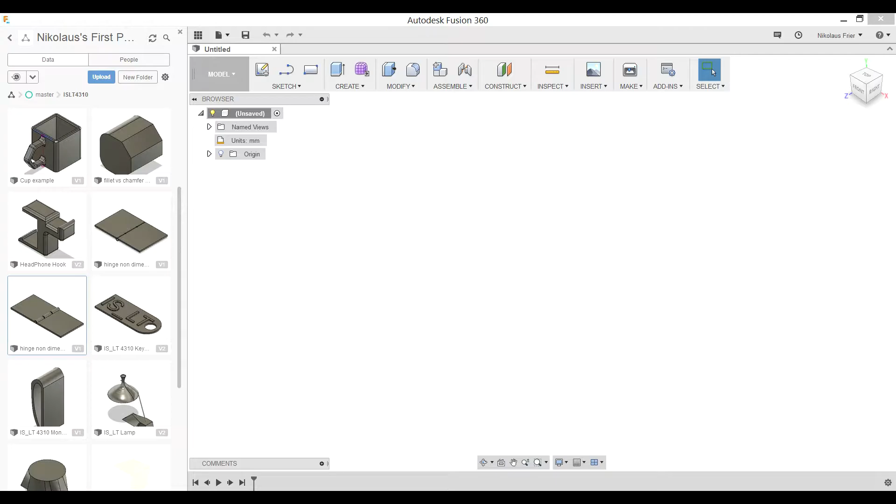Starting off, when you open up Fusion 360, you will need to navigate to the grid or data panel and open up the hinge that you created for MiniProject 3. Now you can go ahead and close the data panel and you should be left with only your hinge mini project open. Starting off, we need to go back to our previous hinge and make some alterations.

As you can see on my screen, right now we have the fins and the rest of the hinge all in one piece. We need to change two things. One, we need to make sure that the fins are the same size as mine now. In the previous mini project, it wasn't stressed, but for this project it is important that my fin dimensions match your fin dimensions. So we're going to have to go back and fix that.

To do that, we're going to go into the fin extrusion. Later on in the video, I'll talk about the accurate dimensions for the width and length of the fin, but for now we're just going to do the thickness of the fins.

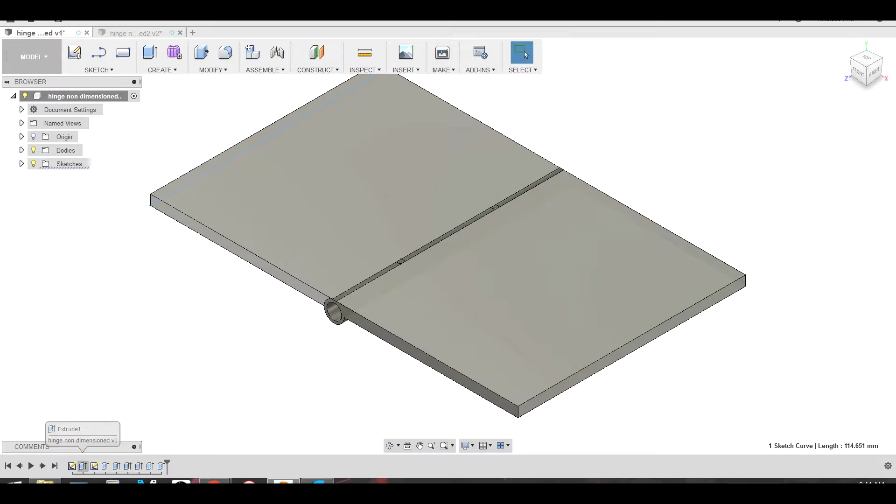Go down to the bottom. It should be the first extrusion in between the two sketches. Right click on it, edit feature. We need to make sure that this distance is 5 millimeters, but in the negative direction. So type in a negative sign and 5 millimeters. Hit OK, and that should automatically update your circles for you as well for the knuckles.

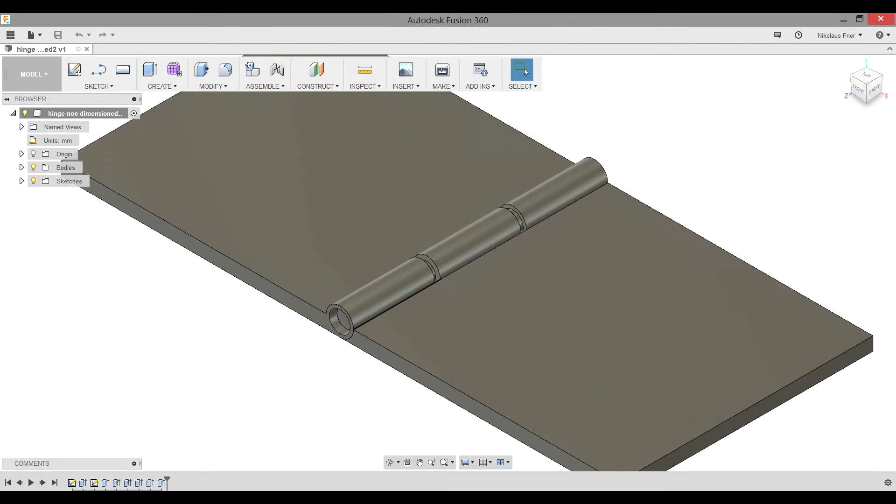If you remember from MiniProject 3, we left certain spaces on each of the fins so that we could indeed fit the knuckles of each fin onto the other. However, one thing we didn't do was make sure that these fins actually had a gap between each other. Right now there is room for the knuckle, but that room is 0. They're touching, and that's not good if we want to try to print this object all together at once.

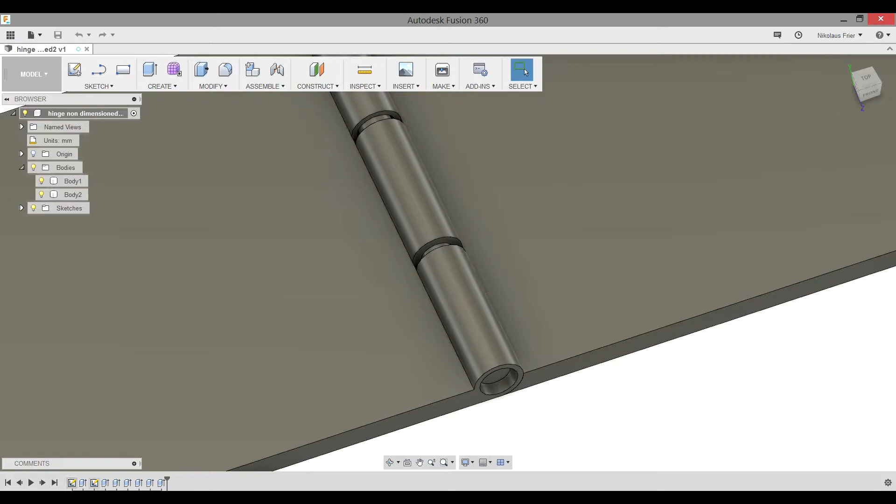What we need to go back to is our circle sketch. Down in the history, you can see our second sketch, or sketch 2. Right click on it. Sometimes edit sketch won't be available right away, so click off again, make sure the sketch is still highlighted, right click, edit sketch. You can also just double click the icon and that should bring up the sketch.

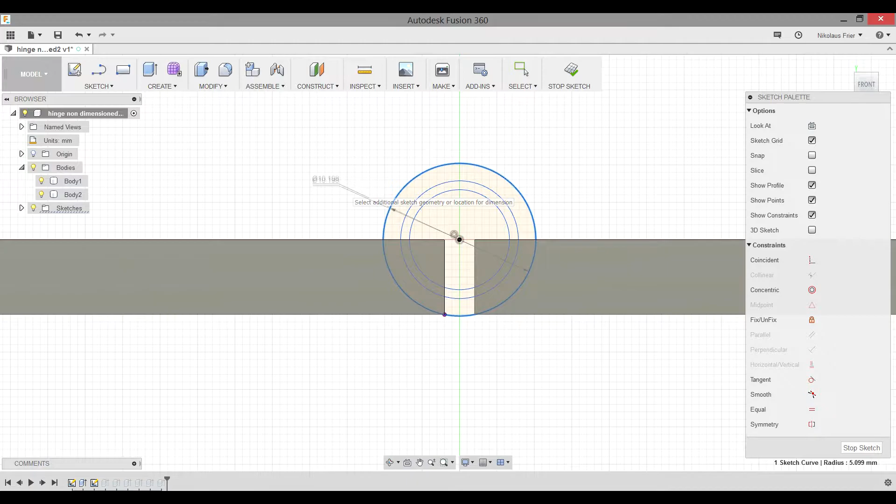Previously we had these 3 circles. Let's start out and dimension our big circle, which should be black, and an error message should pop up saying adding the dimension will overconstrain the sketch. Choose OK to create a driven dimension. We're okay with just a driven dimension, which in this case is something that just tells us how big our dimension is, rather than defining how big the circle is.

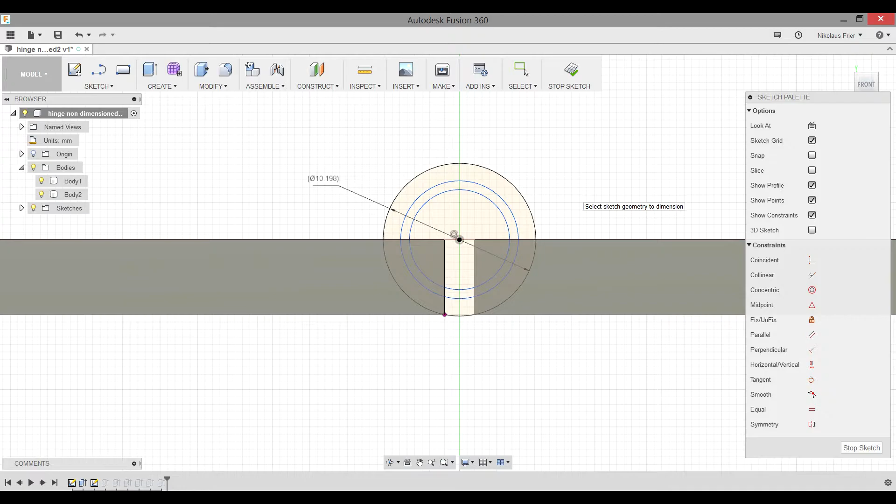This is important to give us a better scale of our other circles that we need to create. So I just talked about fully constrained circles and that we needed our original base circle to be fully constrained. That's this one right here, the currently blue highlighted one. That is our big circle that we made previously. This circle is black because of 2 reasons.

The first reason is that we have the circle started at the origin. It means that when we first created our circle, we clicked this center section and dragged out our circle to the size that we wanted. The second point is that this larger circle is constrained or dimensioned to this corner point of our fins.

The way we did that is when we first started a circle, we went to sketch, circle, center diameter circle. We clicked the origin point. Notice how a little icon pops up that says place center point, and it has a blue circle around the origin. You click that, and then you drag out your circle to this edge. Notice how again it says specify diameter of the circle, and then you just click that. That's how you get that circle to be fully constrained, or to be the black color rather than the blue color.

Another point that I need to bring up is that a little bit in the future, like right after this, I'm going to tell you to dimension this outer circle to be 11.

That's not true. What this dimension actually needs to be is the dimension of our big circle, 10.198, plus 0.5 millimeters. That gets us the correct tolerances for our printers in the makerspace, so that when we print things together as one solid piece, there's no interference with the parts, meaning they can move freely.

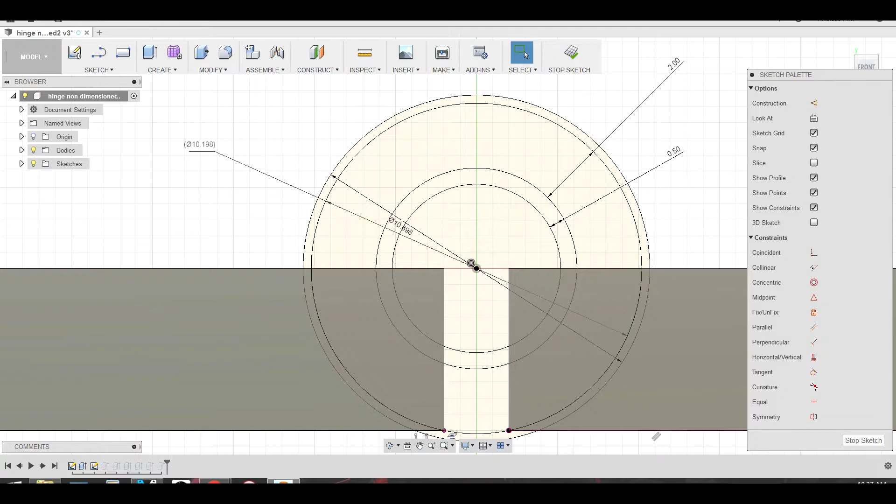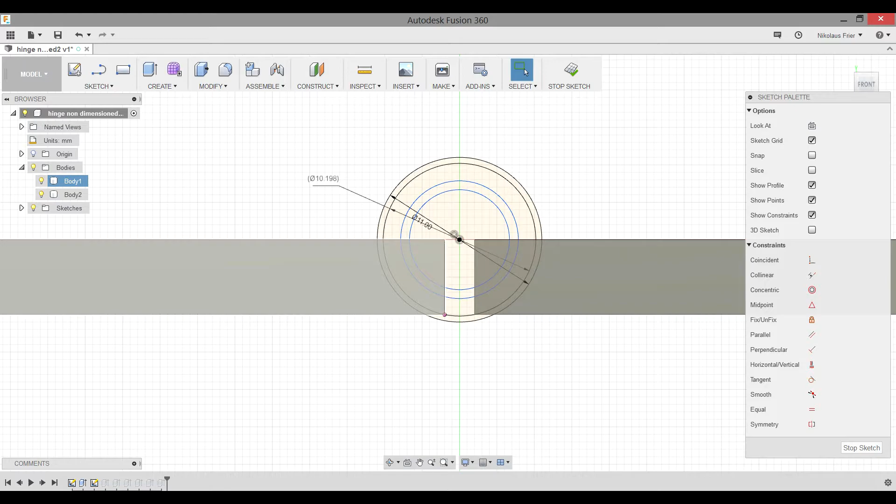So after making a driven dimension on our larger circle, we're actually going to make a circle bigger than that one. Starting with center circle, clicking the origin and going up to 11 millimeters. This is going to allow space for the knuckles to not be touching the fin unless it is the knuckle attached to said.

The next thing we need to do is make sure that our inner circle has a correct dimension with relation to our middle circle. Right now it's at 0.59 millimeters. In order to get a nice and loose print, let's go ahead and change that to 0.5.

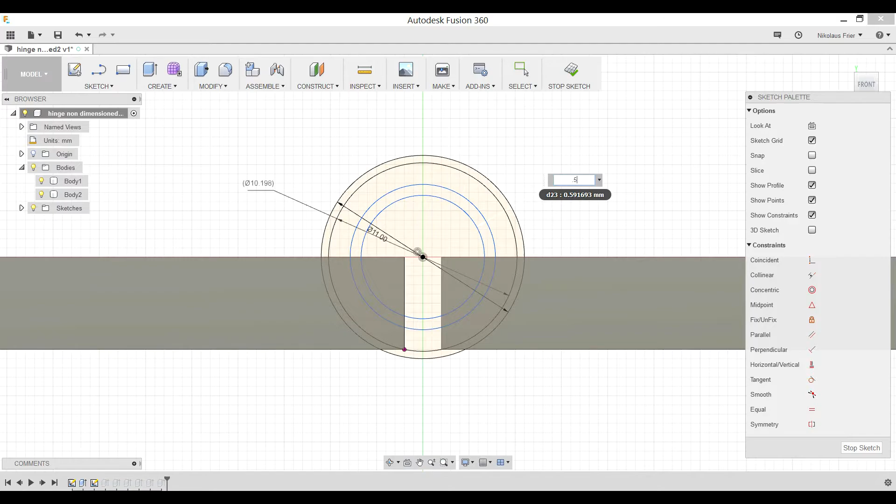The next thing we need to do is dimension our middle circle to our previously bigger circle. We want this to have a little bit more thickness to it to make sure it can withstand the hinge itself. So we're going to change it from 1 to 2.

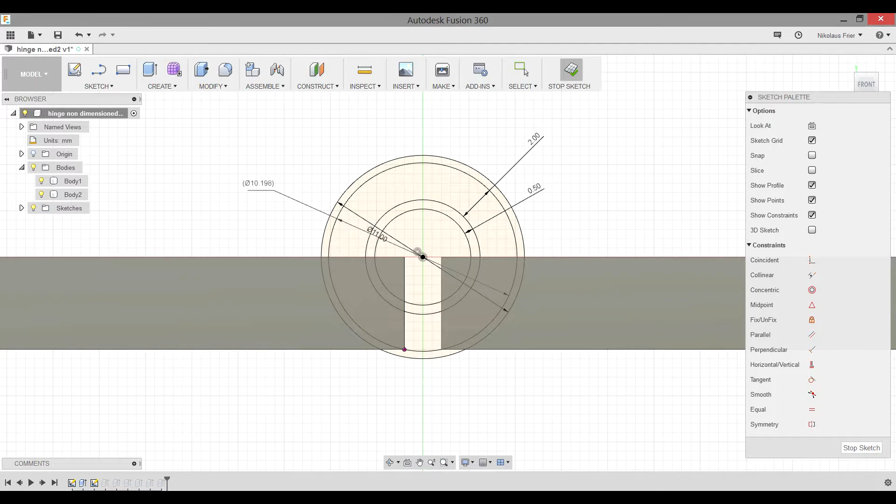Once you have all of these 4 dimensions and the new outer circle, hit stop sketch. This should automatically update your previous feature. Now let's go ahead and hide body 2 to see our fin from before.

We'll need to figure out which feature we actually used to extrude this hole. You'll notice when you select a face that was created by a feature, it highlights that feature down at the bottom with 3 dash marks. Go ahead and edit that feature by left clicking on it, then right clicking and hitting edit feature.

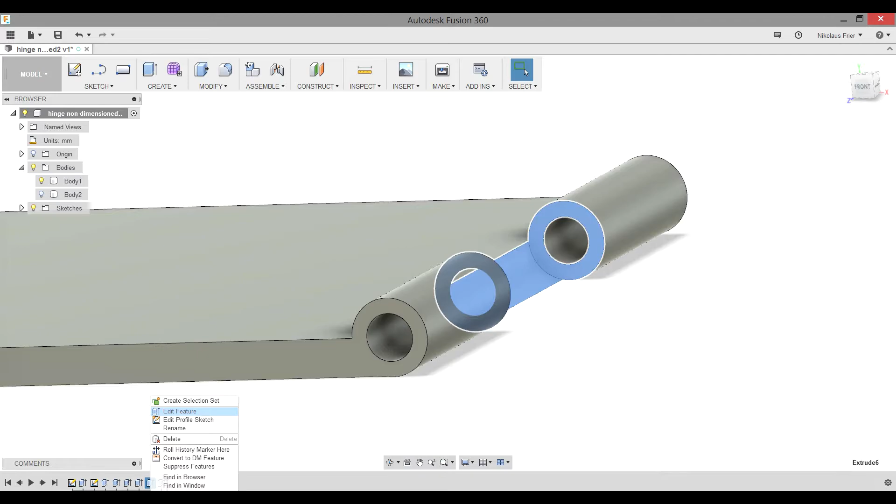What we need to do on this one is actually select our new larger circle to be included in the profile. This will make sure that the knuckle on body 2 accurately slides on this fin.

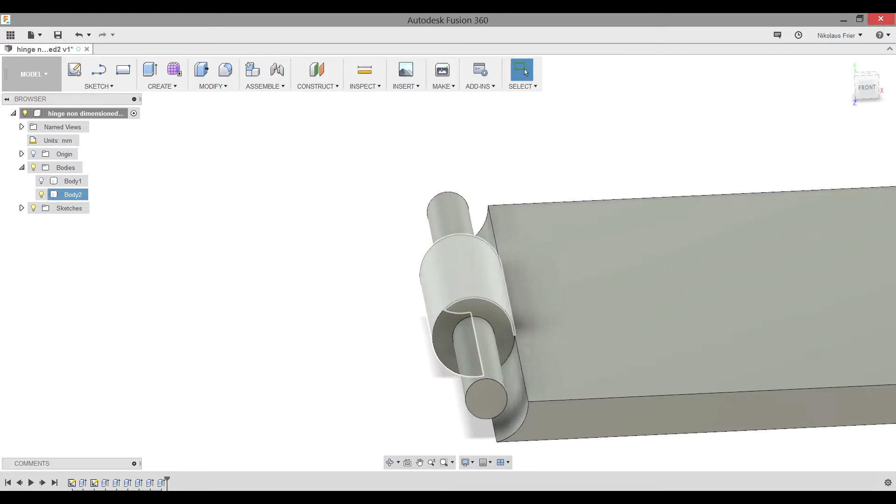Once that is done, we need to go ahead and edit our body number 2. We'll need to do essentially the same thing on this body that we did on the other one. Click on the face that was created by our cut. It'll highlight it. Left click, right click, and make sure to add our new larger circle to our profile.

After adding the larger circle to our cut feature, you'll notice that the knuckle and pin is now an entirely separate body. We don't want this. We need to add something to our circle sketch to make sure that this object stays contained within our fin.

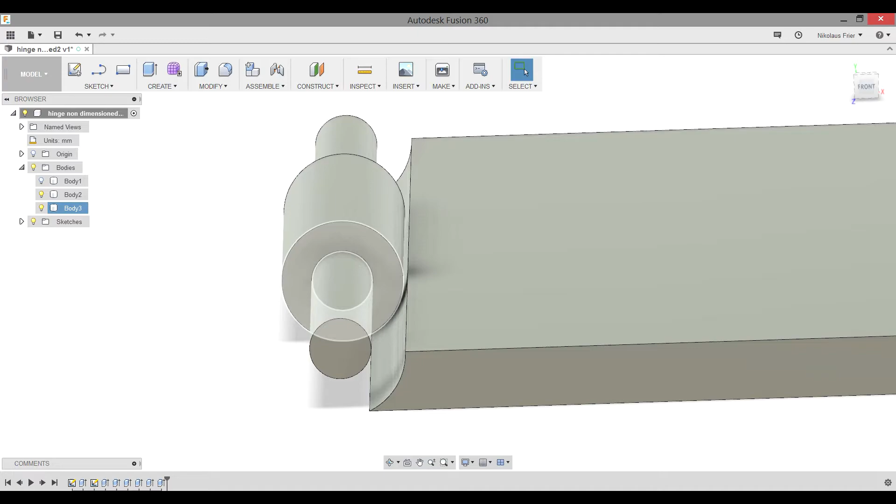Once again, go back to your sketch 2. Left click on sketch 2, right click, edit sketch. Because we still have body 3 highlighted, you see that we can actually see the profile in our sketch. That's great, because that's exactly what we need.

Now, hovering over on the top of your fin, you should see a blue line with a blue X appearing. Go ahead and scroll over until you intersect with our slightly smaller circle, our original big circle. This line should be 5 millimeters at 0 degrees.

Create another line. This time it should be at the end point of our fin. This line needs to line up with our upper line at 5 millimeters. Assign an arbitrary length for our second line.

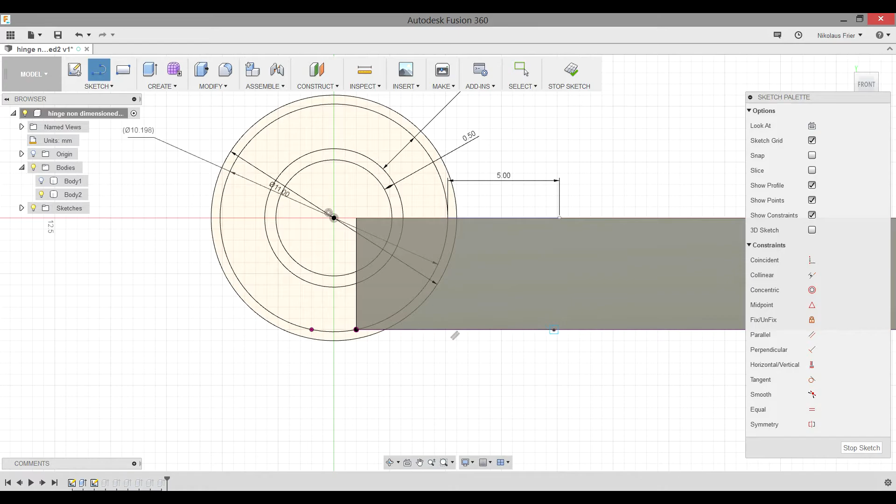Then click on the end point of our second line and the end point of our first line. You'll notice that this line is not perfectly vertical. That can be changed by selecting the line, going over to our sketch palette, and clicking horizontal/vertical.

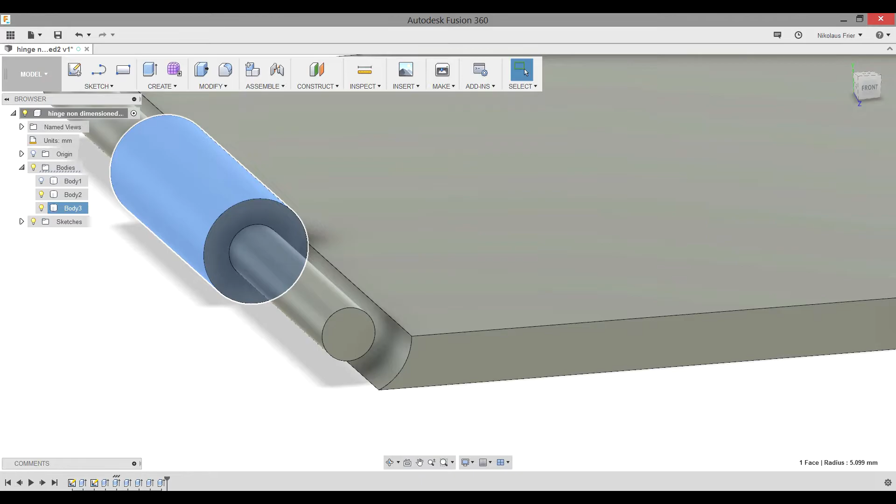Now we have our profile set up exactly how we need. Stop the sketch, go back to our feature by selecting the face of our knuckle, highlighting our extrude feature, left click, right click, edit feature.

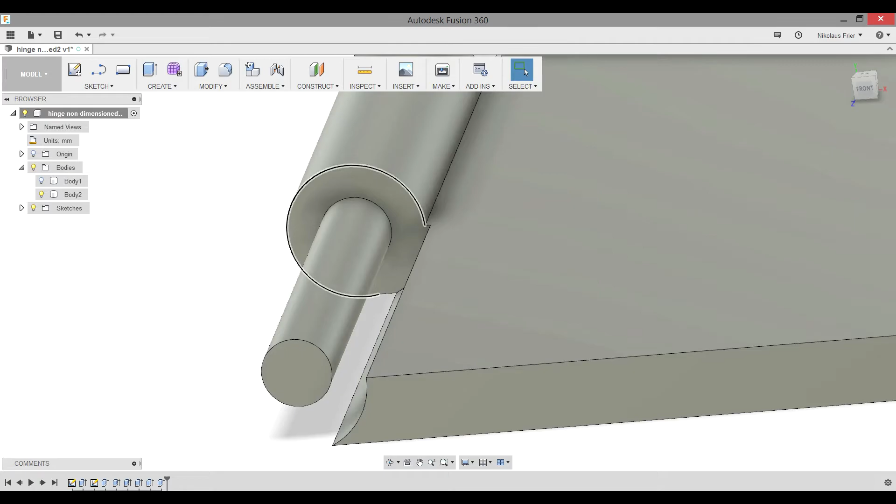Now we need to go ahead and make sure we select the profiles that are of our knuckle. For this case, we can actually just select this weird quarter circle that was created by our 2 lines. We'll notice that body 3 disappeared and it just became body 2 again. All connected into one piece is our fin 2, our knuckle, and our pin, which is exactly what we need.

Now, showing body 1, you can see that there is a gap between each knuckle and the pin. This is great, this is exactly what we need. But something that we didn't do is add any dimensions to our fin. What is this thing actually going to be hinging?

Well, in this case, let's go ahead and try to make an example door hinge. Something really simple: the average door is about 1.5 inch thick and slightly under 7 feet. But we don't actually care about the height of our door, we just care about the thickness, because that's where the hinges will actually be placed.

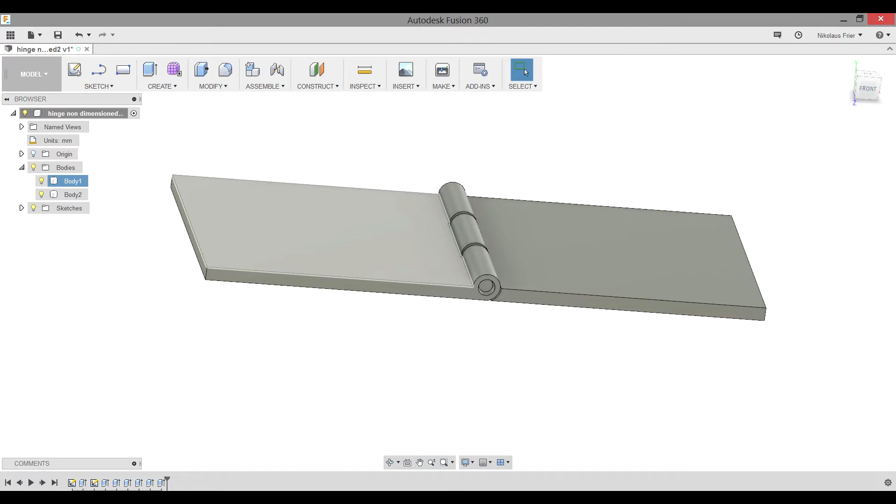Going back to our original sketch, our sketch 1, left click, right click, edit sketch. We need to add dimensions to it. Click D on the keyboard, select the leftmost line and your left middle line.

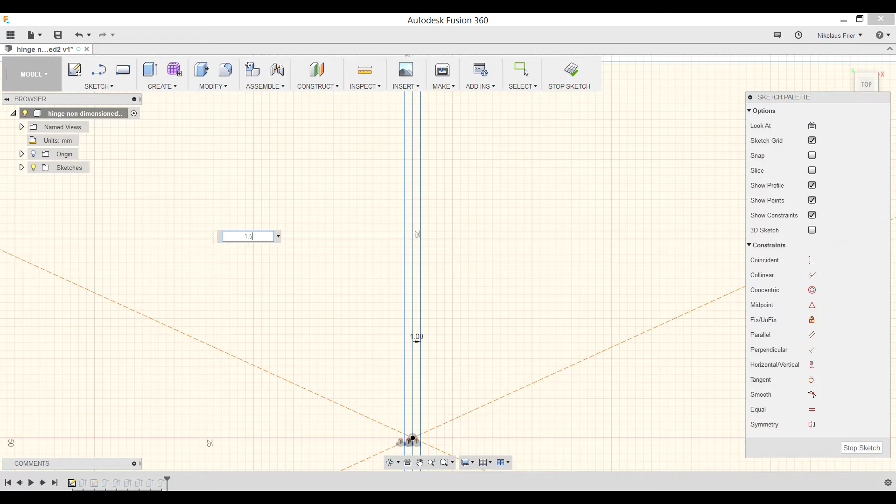Notice, because we added 2 lines on either side of the center line on sketch 1, we now have 3 center lines. That's why I say click the leftmost center line. This will actually be the thickness of our fin. Go ahead and type 1.5 space IN to indicate inches.

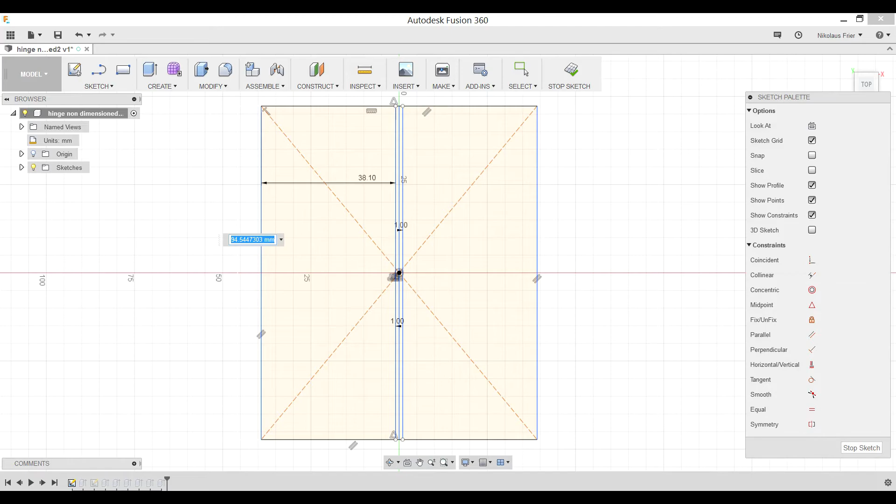It will automatically adjust the other fin for us because of the way we originally created our ring. Let's also dimension the height of our door hinge to fit more adequately with a standard door hinge, which is 3.5 inches. Type 3.5 space IN for inches, hit enter, then hit stop sketch. This will automatically update our file.

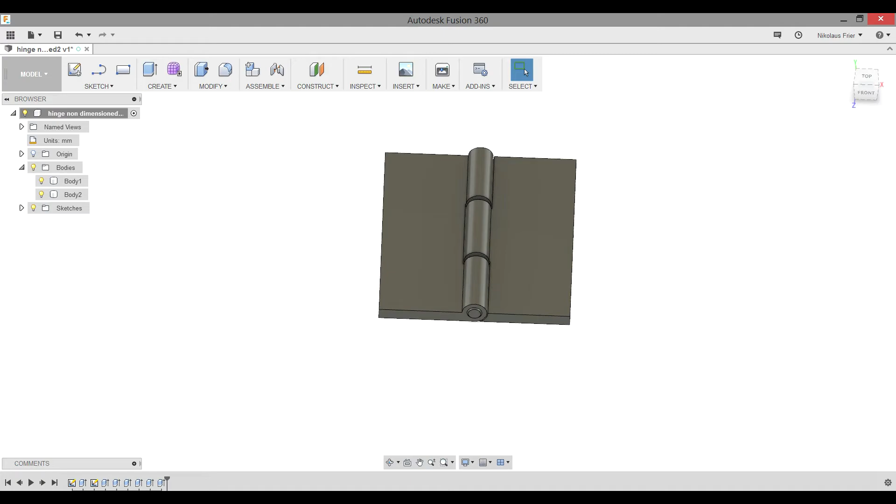There's one more thing we need to add to our hinge to make it more reminiscent of an actual hinge, and that is holes on the fin. To do this, we're going to edit our original sketch to add holes, then change the profile of our extrusion to incorporate these hole regions. We need to go to the circle command, center diameter circle.

On the diagonal lines created from our rectangle, we're going to set the center of our circle. Go ahead and pick a piece at random. We're going to do a 7.5 millimeter diameter hole, hitting C diagonal line to get our intersection point, selecting it, choosing a random length, then clicking D for dimension, clicking our new circle, changing that dimension to 7.5 millimeters, hitting enter, creating yet another circle.

This needs to be lined up with our origin. If you hover over the red line, it should automatically keep it horizontal to the origin point. Go ahead and type in 7.5 millimeters.

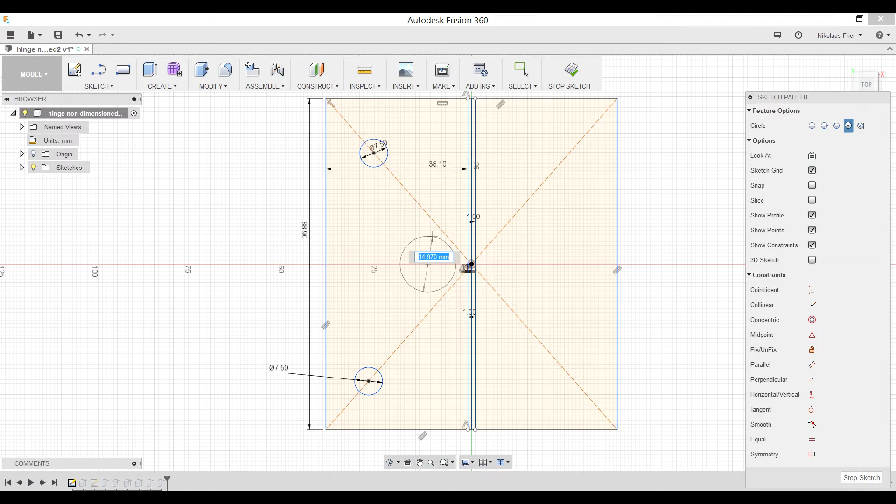One more problem we have is that these holes are not lined up with each other. Take a line and draw it from the center of our top circle to the center of our bottom circle. You can change this line to be construction, which will make it an orange dashed line. Select this line again because we do want it to be vertical.

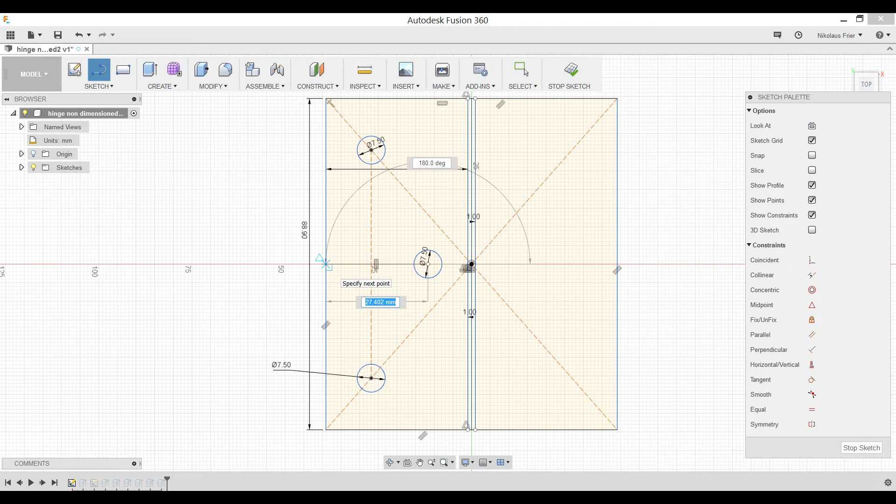Now we need to align our middle circle. Going to line, selecting the center of our circle to the midpoint of our leftmost vertical line, changing this new line to construction, hitting D for dimension, selecting our newest line, and changing this to 25 millimeters. Next, we need to align our top and bottom holes to our middle hole.

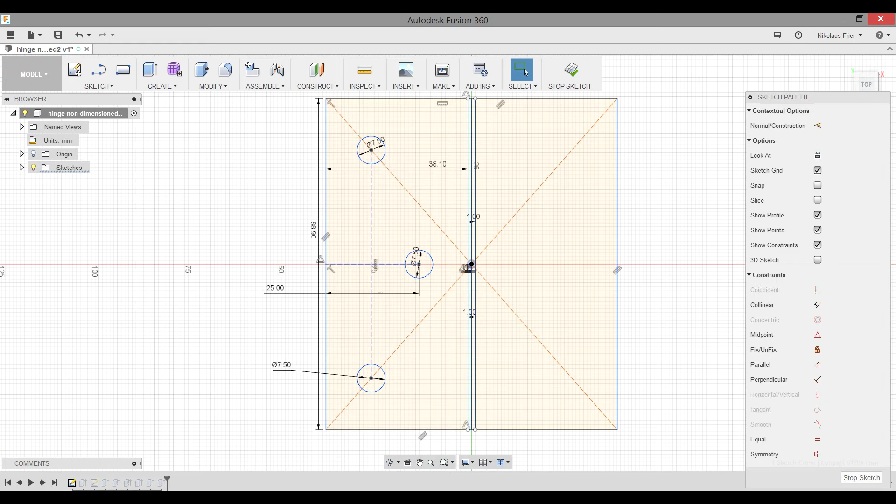Select the orange line that connects those two and the orange line that connects our mid-circle to our leftmost line. Go over to your sketch palette and click midpoint.

Now that we have the circles on one side, we need to copy them over to the other side. Going to sketch, mirror, select our circles and the 2 construction lines we created for the objects. For mirror line, we select the actual mid line. You'll notice a preview here, hit OK. This will also copy over the dimension from our left side.

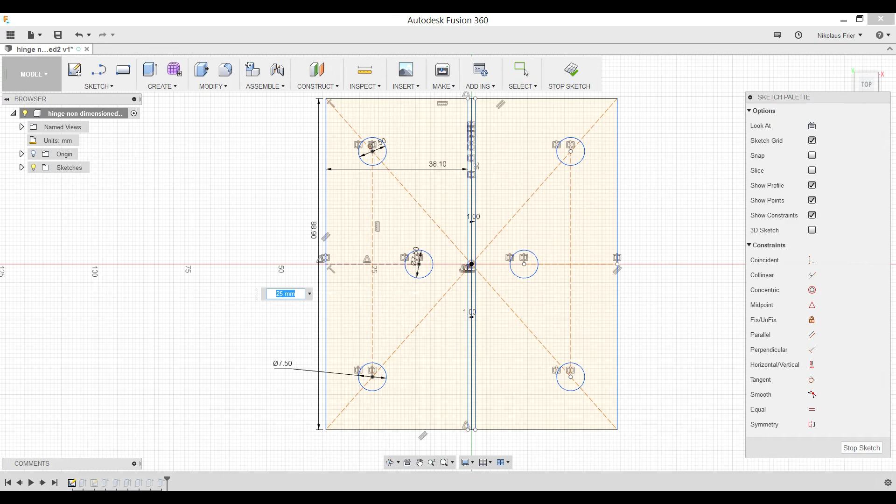Let's say we change our original middle circle from 25 millimeters to 20 millimeters. You'll notice that it changed our mirrored copies as well. But let's go ahead and undo that.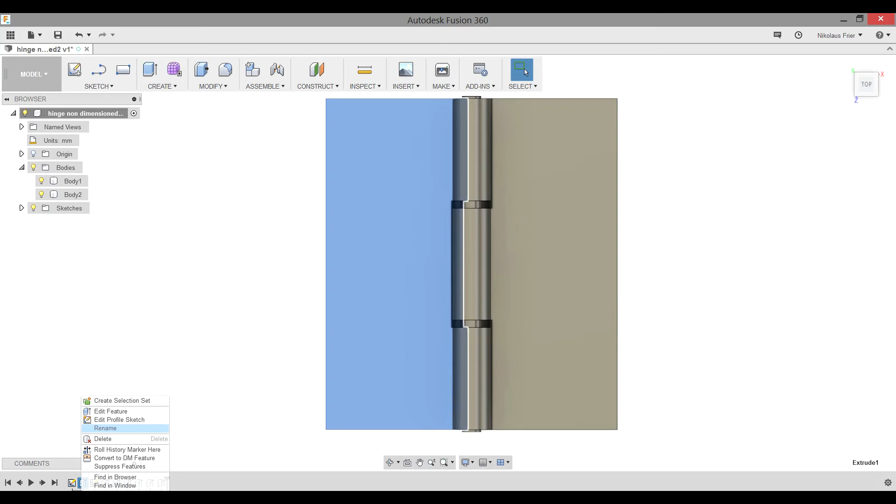Stop sketch. Now to make sure these circles are accurately portrayed in our fins, we need to change the original extrusion that we did, and click on one of the fins, which will highlight our extrusion. Left click, right click, edit feature. Make sure to deselect all of our circles. And now our hinge is actually looking like a hinge.

Congratulations, you've learned how to accurately dimension something. Remember that in order to get something to print all as one piece, you need to leave tolerance. A piece will not fit together if the size of the peg is the same size as the hole. The peg needs to be smaller than the hole.

Now I mentioned that we can save this as one STL to get it to print all in a single print. In order to do that, you need to make sure A, it's saved with all of the correct dimensions, and B, you need to go up to your named icon in the browser. It should be right at the top of named views and units, and right under the sketch. Right click on the name and save as STL.

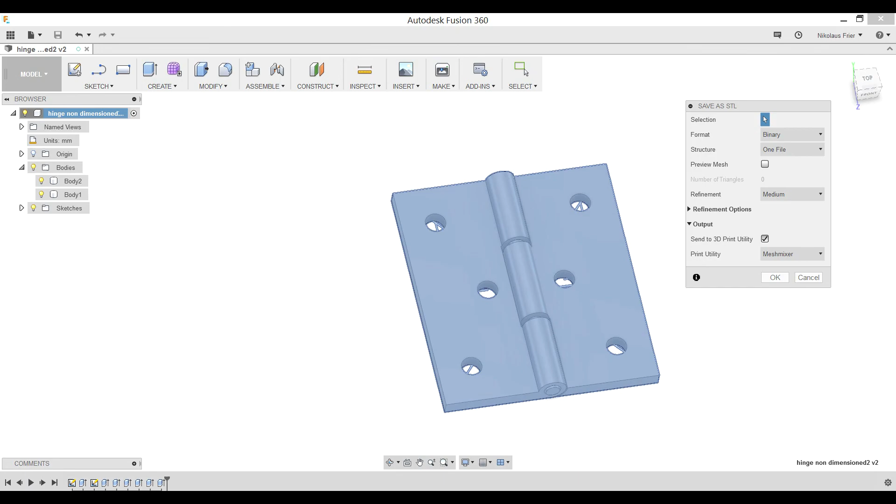This is an indirect way to make sure that all the bodies currently visible will be saved into a single STL file. Make sure to deselect send to 3D print utility and hit OK. Now you can save it anywhere on your computer that you need.